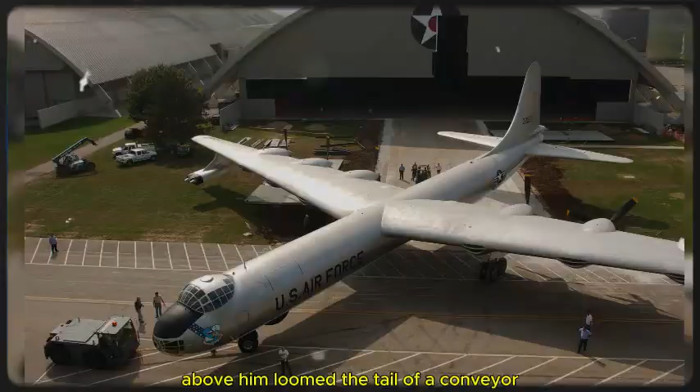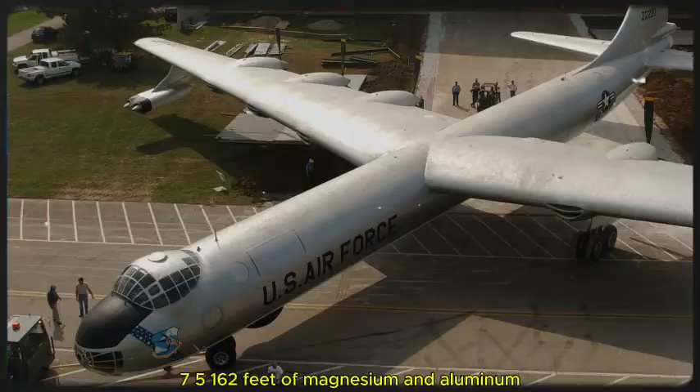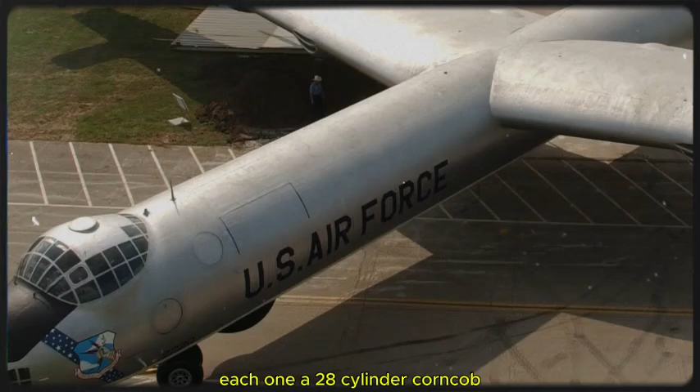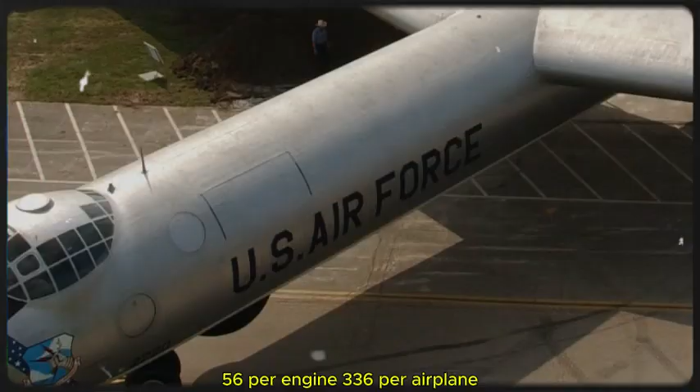The air burned. Metal tools, if you picked them up barehanded, took a layer of skin with them when you let go. Above him loomed the tail of a Convair B-36B Peacemaker, serial 4492075, 162 feet of magnesium and aluminum stretched against a sky so dark it looked like the inside of a coal stove. The bomber's 6 Pratt & Whitney R4360W Wasp Major engines sat cold in their nacelles, each one a 28-cylinder corncob displacing 4,360 cubic inches. Each cylinder had 2 spark plugs, 56 per engine, 336 per airplane.

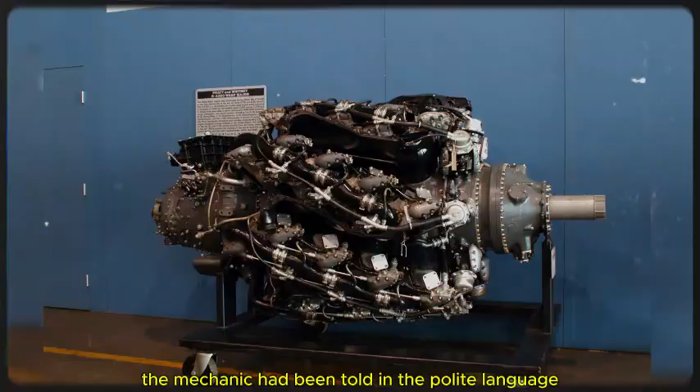Every one of them had to fire. Every one of them had to fire in this cold. The mechanic had been told, in the polite language the Air Force sometimes mistakes for clarity, that if you shut these engines down at these temperatures, you could not restart them. Not that it was difficult, you could not restart them.

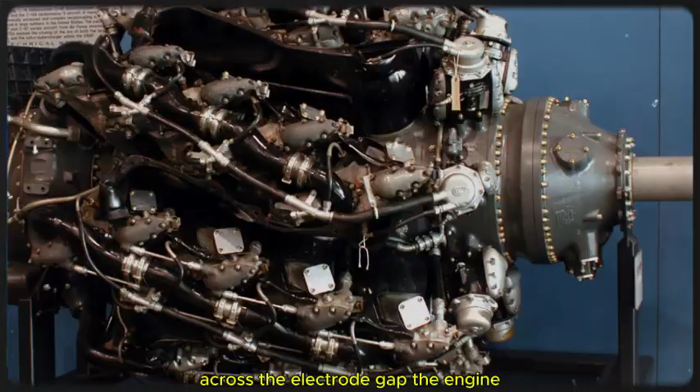The oil became the consistency of cold honey. The batteries lost 2/3 of their cranking amperage, and when the starter finally turned the prop, a single misfire on a single cylinder would coat a plug with unburned fuel that froze into a glaze of ice across the electrode gap. The engine, stone dead, would refuse to fire until someone pulled the cowl, unscrewed the plug, warmed it in his hands, and screwed it back in. Now do that 56 times on an engine buried in a wing, at 40 below, in the dark.

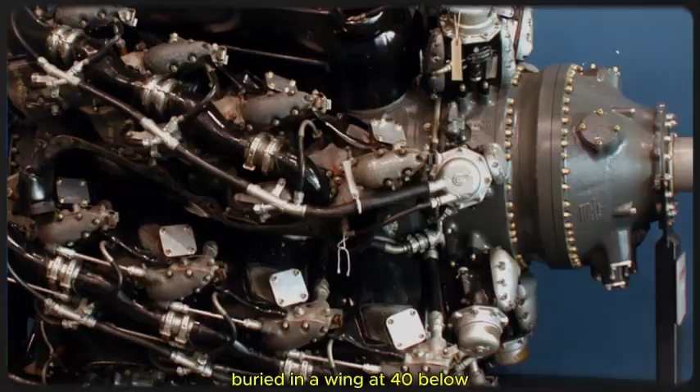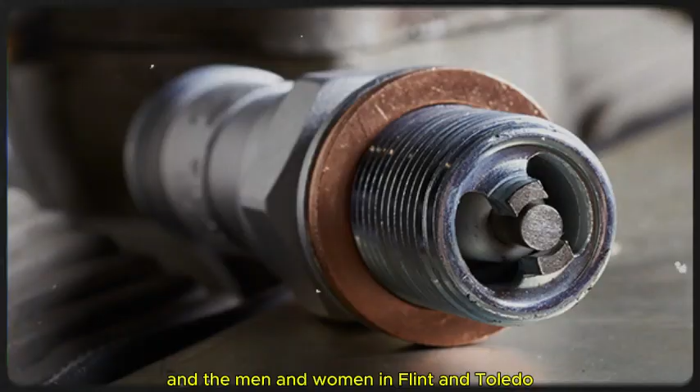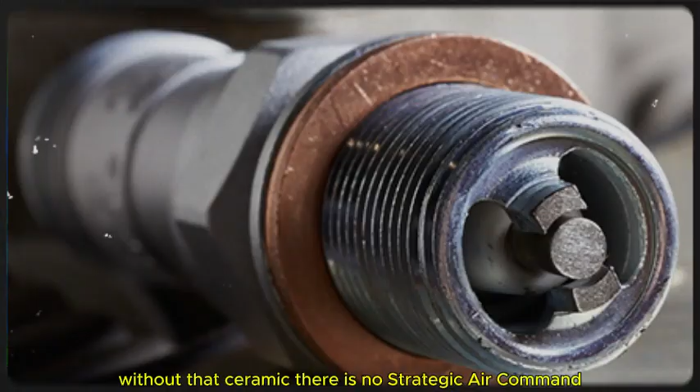This is a story about a small thing, a ceramic cone the size of a shotgun shell, and the men and women in Flint and Toledo who learned how to make it survive a kind of cold the United States had never had to fight in before. Without that ceramic, there is no Strategic Air Command, there is no deterrent. There is no bomber circling the pole at 40,000 feet waiting for a coded order that, thank God, never came.

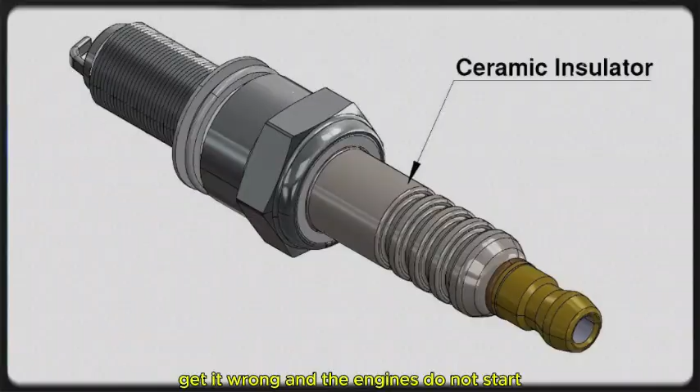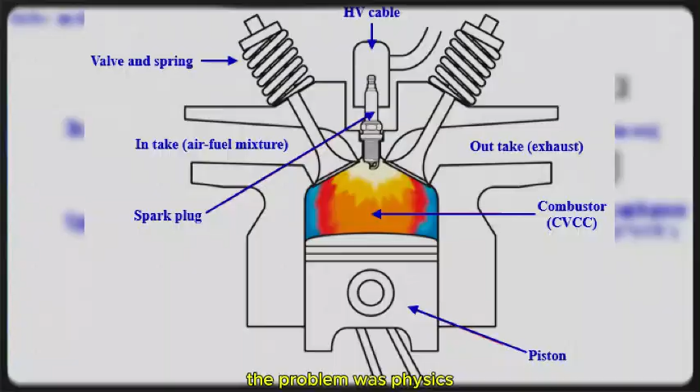The spark plug is the whole Cold War in miniature. Get it wrong, and the engines do not start, and the bombers do not fly, and Moscow learns something about American resolve the Politburo would have been pleased to learn. The problem was physics, and physics does not care about politics.

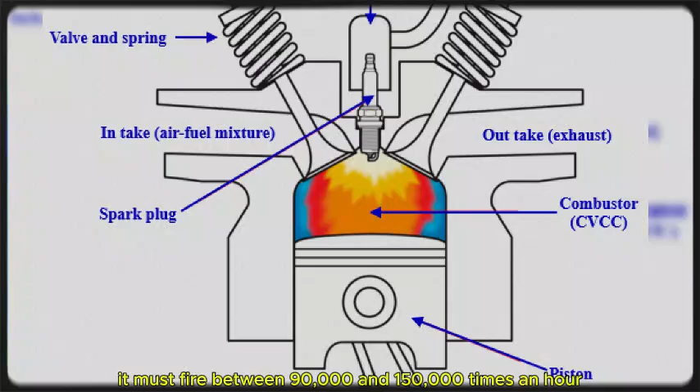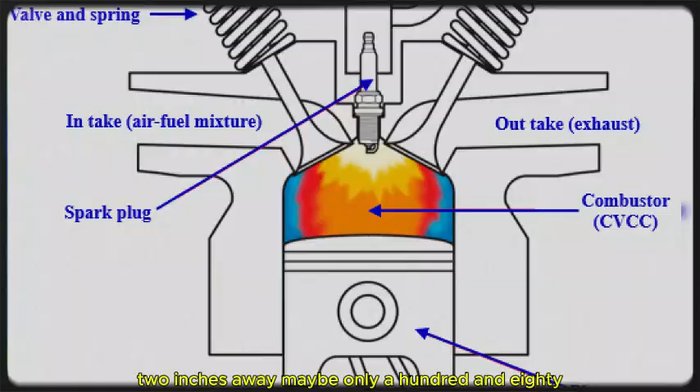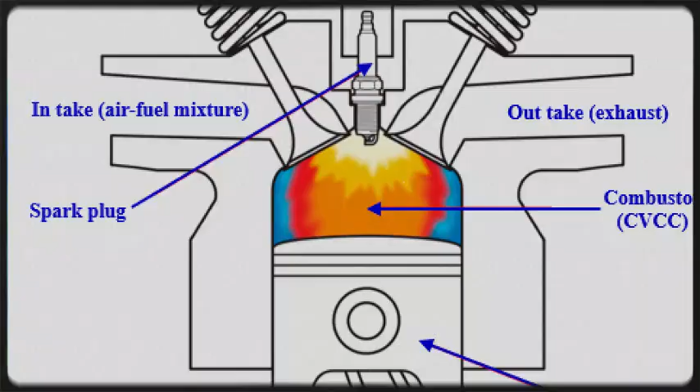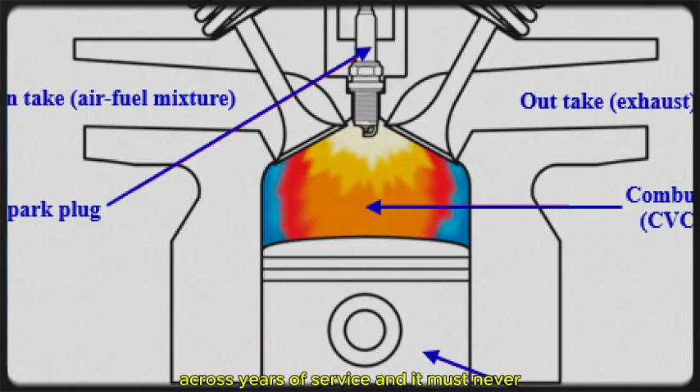A spark plug is asked to do something preposterous. It must fire between 90,000 and 150,000 times an hour. It must survive temperatures of 1,200 degrees Fahrenheit on its firing tip, while the other end, 2 inches away, may be only 180. It must jump an electric arc of between 6,000 and 20,000 volts across a gap roughly the thickness of a nickel inside a combustion chamber filled with burning high-octane fuel at pressures that would burst a cast iron pipe. It must do this for hundreds of hours, across years of service, and it must never, not once, not even for a single revolution, fail to do it on command.

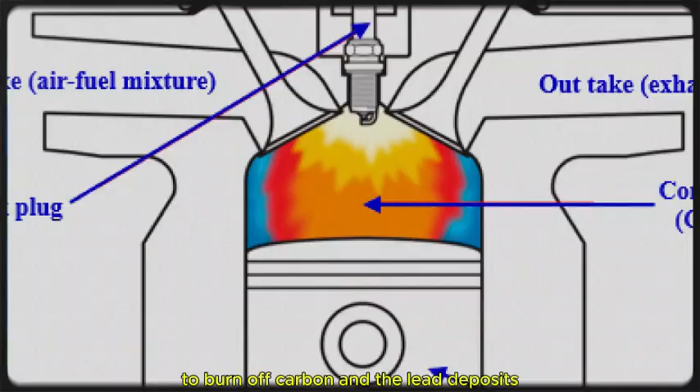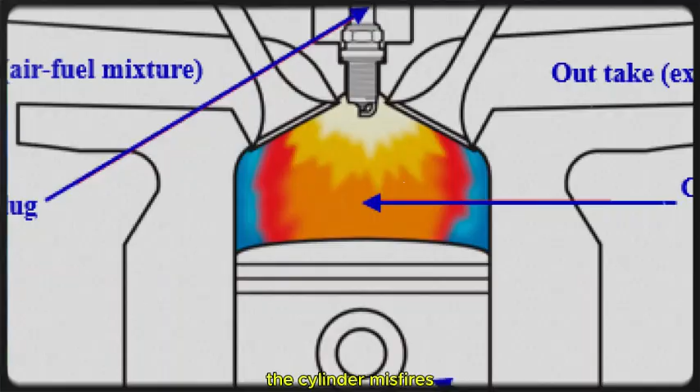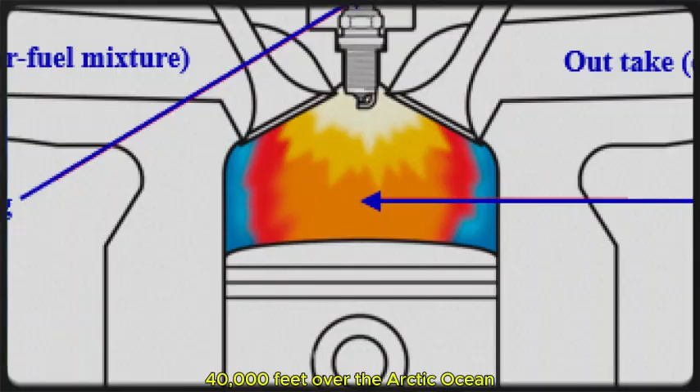The tip of the plug has to run hot enough, at least 800 degrees Fahrenheit, to burn off carbon and the lead deposits left behind by tetraethyl lead in aviation gasoline. If it runs any colder, the carbon accumulates, the gap fouls, the spark fails. The cylinder misfires, and when one cylinder of a 28-cylinder engine misfires, the whole engine shudders and pulls against itself, and a flight engineer 40,000 feet over the Arctic Ocean watches a dial swing the wrong way and begins to calculate how much time he has.

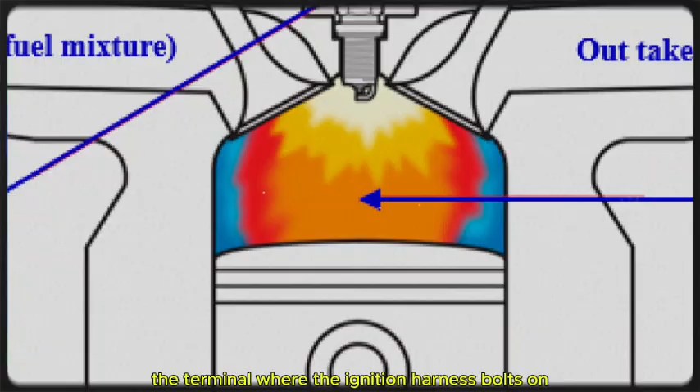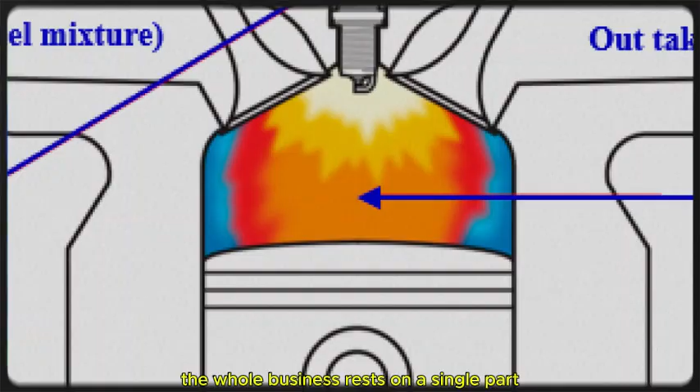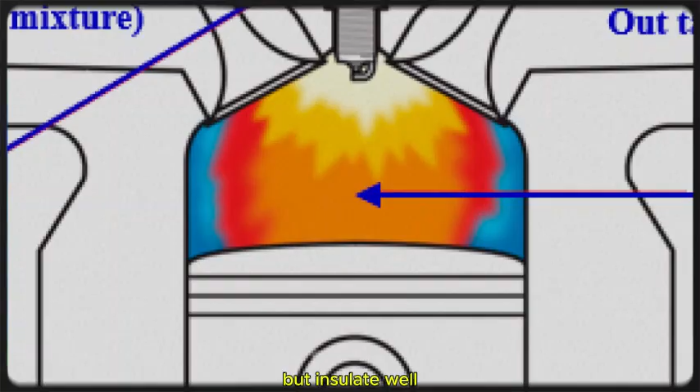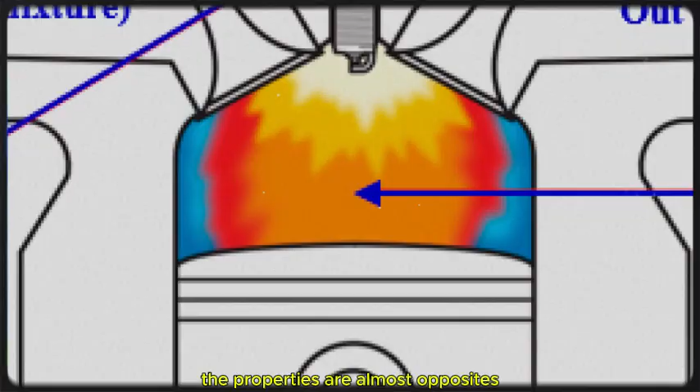So the tip must be hot, but the upper end of the plug, the terminal where the ignition harness bolts on, must stay cool because the electrical insulation cannot tolerate combustion chamber temperatures without breaking down. The whole business rests on a single part, the ceramic cone in the middle. That piece of fired white material, no bigger than a candle stub, has to conduct heat well enough to dump combustion temperatures down into the cylinder head, but insulate well enough to force tens of thousands of volts through a tiny gap rather than leaking sideways into the metal shell. Heat conductor, electrical insulator. The properties are almost opposites. Find a material that balances them and the engine runs. Fail to find one, and you have a very heavy sculpture.

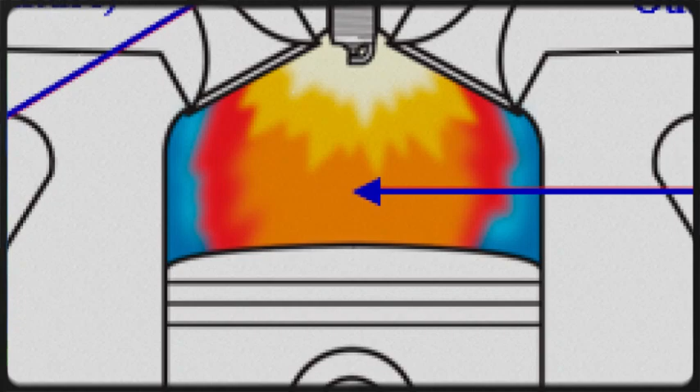For 50 years, spark plug makers had been trying to find it, and for most of that time, they got it wrong.

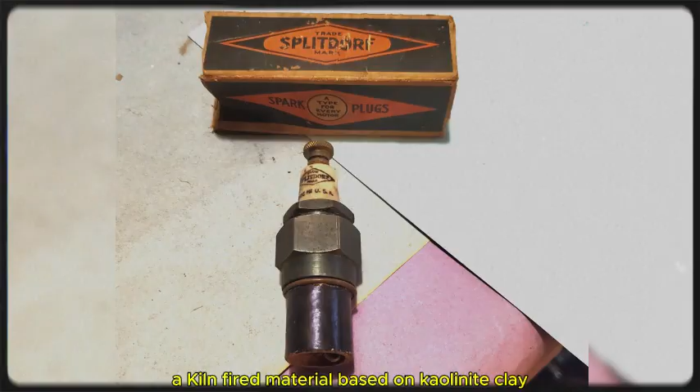Then came mica, thin translucent sheets of the mineral compressed into a cylinder by tension on the center electrode. Mica tolerated heat better than porcelain. It was the material of choice for aviation plugs through the First World War and into the Second. But mica had a fatal weakness. It was a laminate. Lead salts from the combustion crept between its layers. The cleaning intervals shrank from hundreds of hours to tens, and in a four-engine bomber, that was a maintenance burden the peacetime Army Air Corps could absorb only because it did not fly very many of them very far.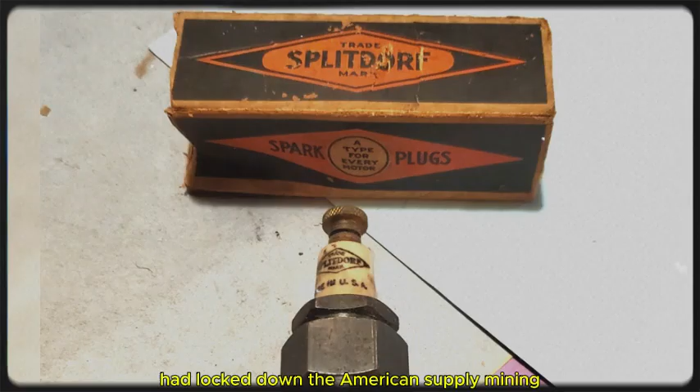Then came sillimanite and andalusite, two related aluminum silicate minerals, sister crystals of the same chemistry found in ancient metamorphic rock. Champion Sparkplug in Toledo had locked down the American supply, mining most of it from a single site called the Champion Mine in Inyo County, California. Their dominance of that one mountain gave them dominance of the plug market through the 1930s. A plug with a sillimanite insulator was tougher than porcelain and cleaner than mica. But sillimanite was a compromise, and everyone knew it.

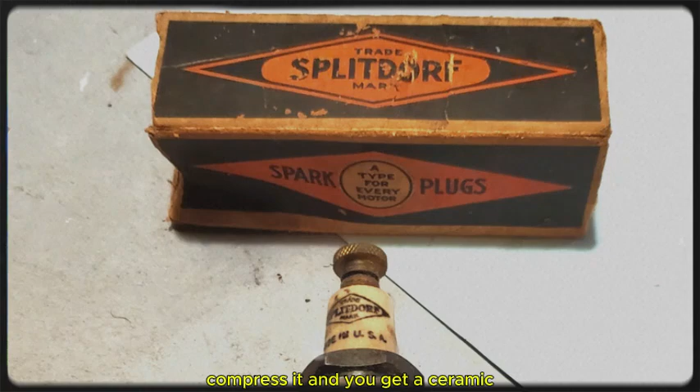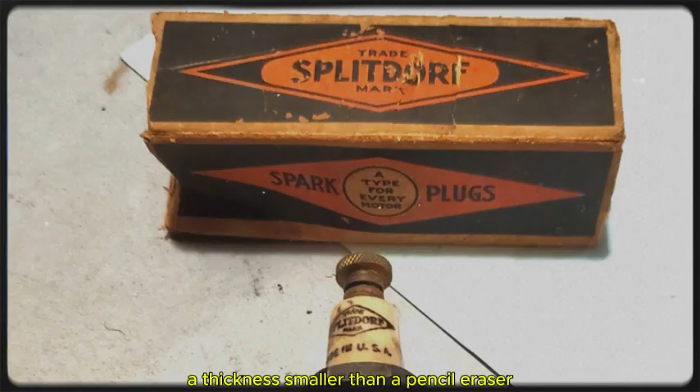Something better was coming. That something was sintered aluminum oxide, alumina, Al2O3, a simple compound, 2 aluminum atoms and 3 of oxygen, held together by one of the strongest ionic bonds in nature. Heat it to 1600 degrees Celsius, compress it, and you get a ceramic with nearly the thermal expansion of steel, 3 times the strength of sillimanite, and dielectric properties that let it hold back 60,000 volts across a thickness smaller than a pencil eraser.

Siemens in Germany and AC Sparkplug of Flint, Michigan had both developed versions of sintered alumina during the 1930s, but the process was expensive, the advantages were incremental, and the war came before anyone was willing to retool the factories. The Cold War did not give that luxury. The Cold War demanded alumina. By the time the bombs fell on Hiroshima, both American manufacturers, AC Sparkplug, a division of General Motors, and Champion, the Toledo independent, were beginning the conversion.

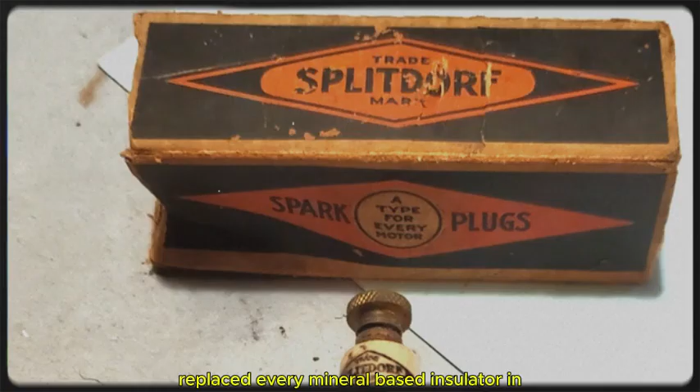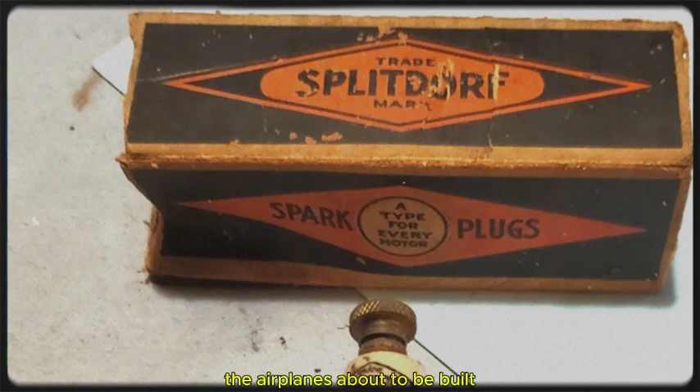By 1948, alumina had essentially replaced every mineral-based insulator in American aviation plugs. The sillimanite mine quieted down. In Flint and Toledo, the kilns ran 20 hours a day. They had to, because the airplanes about to be built would not be built for temperate war.

Anyone who has seen a photograph of Thule Air Base in midwinter knows the mood. The base sits at 76 degrees north latitude, about 900 miles from the geographic North Pole, on a gravel plain where the sun does not rise for 4 months.

Construction began in 1951 under the codename Operation Blue Jay. Most of the buildings went up in the first 60 days by men working in temperatures that shattered hydraulic hoses and made diesel fuel gel in its tanks. The finished base had a 10,000-foot runway, 10 hangars, and fuel storage of roughly 100 million gallons. At its peak, 10,000 Americans lived there.

They were there because, if the war came, Thule was where the bombers would launch from. The Great Circle route from Greenland to Moscow is shorter than the route from Kansas. The Air Force built Eielson in Alaska for the same reason. Both bases served as what planners called forward operating locations, polite bureaucratic language meaning the place from which you would fly the mission that would end everything.

And so the United States Strategic Air Command in the early 1950s found itself holding the keys to a strategic doctrine that depended on an engineering problem nobody had fully solved: how to start a very large reciprocating aircraft engine reliably in temperatures that could reach -60 Fahrenheit on the ramp. The demand was ferocious. The B-36 Peacemaker had 6 R-4360s. Each R-4360 had 56 spark plugs. A wing of 30 bombers needed more than 10,000 plugs just to fly.

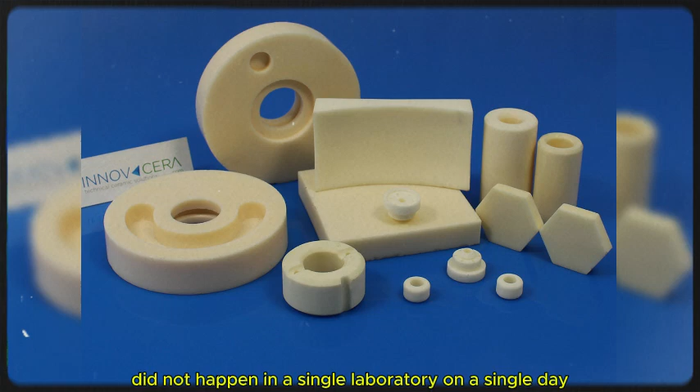You can see now why the ceramic mattered. The breakthrough that made Cold War strategic air power possible did not happen in a single laboratory on a single day. It was incremental, the product of thousands of small adjustments by chemists and ceramic engineers at AC Sparkplug in Flint and at Champion in Toledo, and later at Bendix Scintilla in Sidney, New York, which produced the low-tension magnetos and fine-wire plugs specified for the B-36's ignition system.

The technical problem was this: the ceramic had to be made of nearly pure aluminum oxide, but nearly pure alumina is almost impossible to sinter, to fuse into a dense solid, without tiny additives called sintering aids. These additives lower the melting point of the grain boundaries and allow the particles to bond together without the whole piece collapsing. The trick was to add enough to sinter, but not so much that dielectric strength suffered.

Early formulations ran around 95% alumina and 5% glass former. Over time, manufacturers pushed that ratio higher, toward 98 then 99% pure alumina, using small amounts of magnesium oxide, silicon dioxide, and rare earth additives like yttrium and lanthanum to control grain growth.

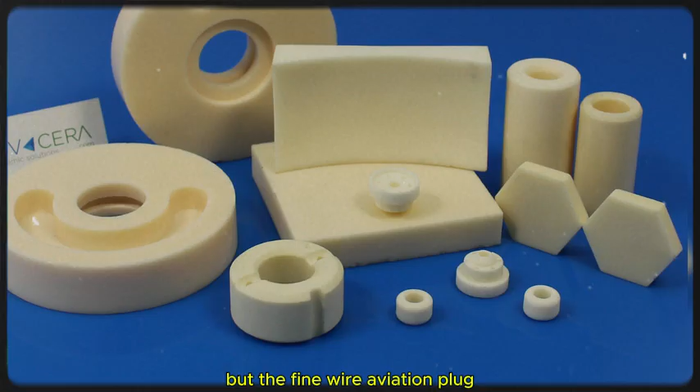The center electrode was a separate problem. A solid nickel wire worked at moderate temperatures, but the fine wire aviation plug specified for the R-4360 used a center electrode of platinum or platinum-iridium alloy surrounded by a copper core that pulled heat down into the body of the plug. In the early 1950s, a single fine wire aviation plug cost more than a good wristwatch. A B-36 flew with 336 of them.

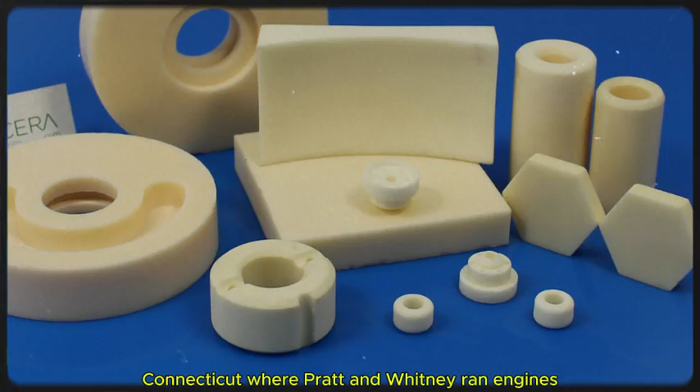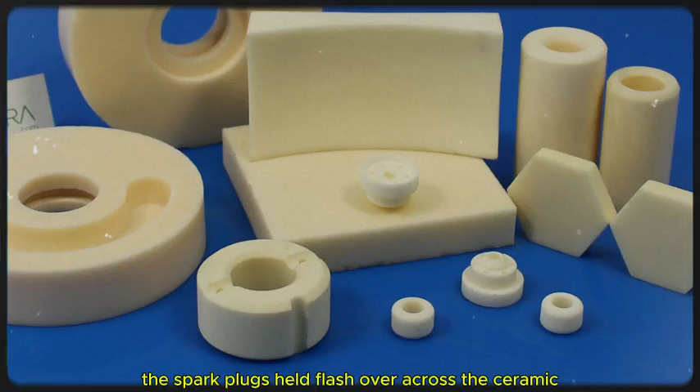The proof came in the test cells at East Hartford, Connecticut, where Pratt & Whitney ran engines against a wall of instrumentation in enclosures built to absorb the noise and, if it came to it, contain the fire. Engines were started cold. Engines were started hot. Engines were started after being soaked at simulated altitude, -65 Fahrenheit at 40,000 feet. The spark plugs held. Flashover across the ceramic, the electrical leakage that had plagued porcelain, dropped to almost nothing.

The carbon burn-off was clean. The issue over its startup remained, and preheat remained mandatory, but the plugs themselves, once lit, stayed lit. That was the breakthrough. Not that the plug solved the cold problem by itself, but that the plug stopped being the weakest link. The plug was no longer the reason the engine failed to start. Everything else, the oil, the battery, the carburetor, the magneto, could be addressed with heaters, with multi-viscosity lubricants, with external power carts. The plug, for the first time since men had been putting wings on radial engines, could be assumed.

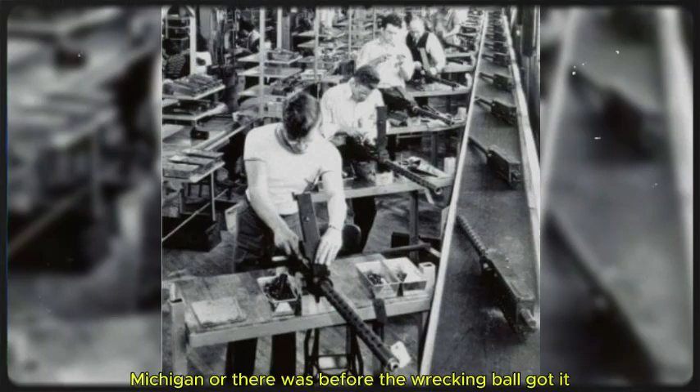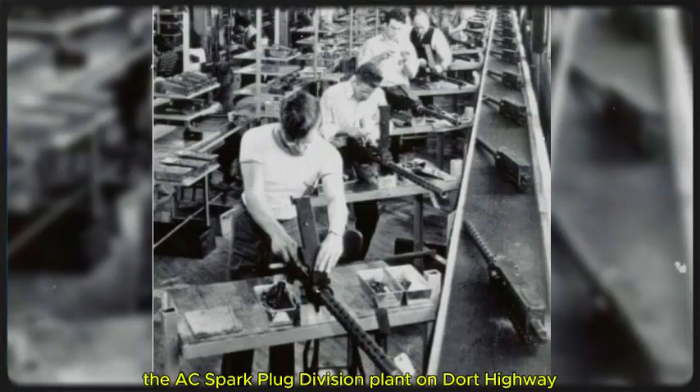There is a building on the south side of Flint, Michigan, or there was before the wrecking ball got it, that deserves a sentence in every history of the Cold War and almost never gets one. The AC Spark Plug division plant on Dort Highway employed somewhere between 15 and 20,000 people at its peak in the early 1950s.

It made the bulk of the aviation plugs used by the United States Air Force. During the Second World War, the same plant had built one of the largest numbers of Browning M2 50-caliber machine guns of any American facility, but that is another story. After the war, the machine gun lines were torn out and the plug lines expanded.

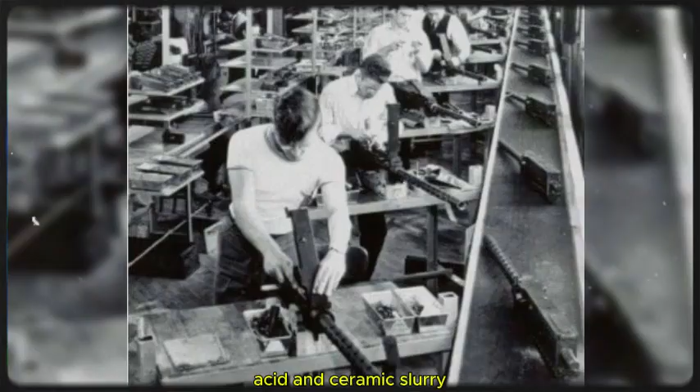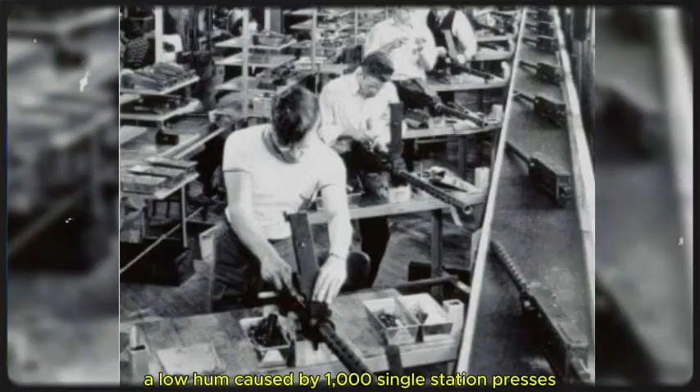The building smelled of electroplating acid and ceramic slurry and the vinegary tang of hot glaze. The floor vibrated at a specific frequency, a low hum caused by 1,000 single-station presses compacting alumina powder into the rough shape of an insulator, each press cycling about 4 times a second.

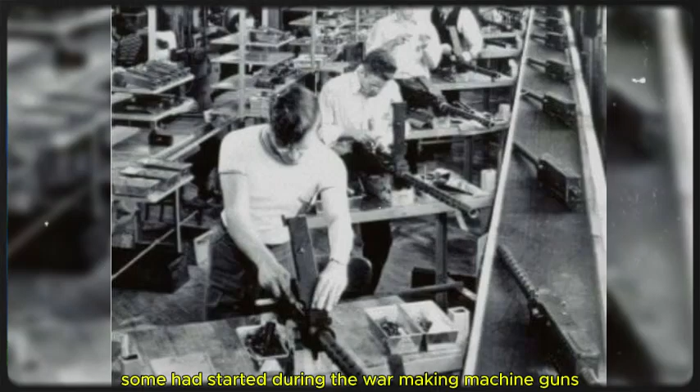Most of the operators were women. Some had started during the war making machine guns and stayed on when the lines changed. Others had been hired out of the small farming towns north of Flint, Clio, Mount Morris, Birch Run, when their husbands came home from the Pacific and the family needed a second income. They stood all day at benches sorting finished insulators for cracks under a row of magnifying lamps. A chipped ceramic, undetected, would cost an engine in a bomber. They knew this. Nobody had to tell them.

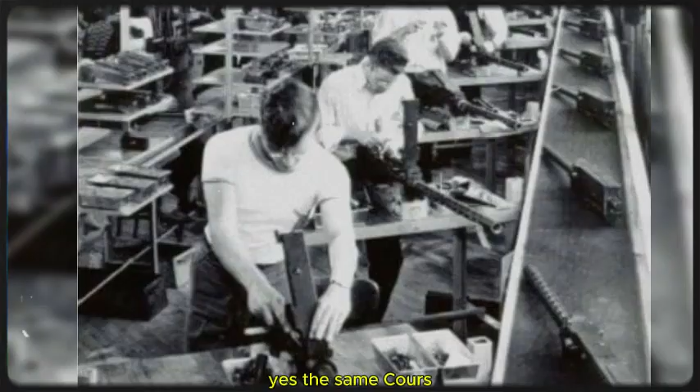Champion, in Toledo, ran a parallel operation. So did Autolite. And on a smaller scale, so did the ceramic division of a company called Coors. Yes, the same Coors. The brewing family had started in porcelain long before they were famous for beer, and the Coors Porcelain Company of Golden, Colorado made ceramic components for a range of American industrial needs during the Cold War.

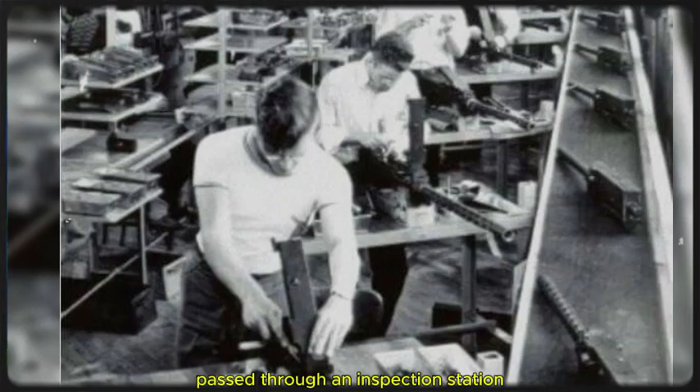Small items, critical items. At AC, a finished aviation plug passed through an inspection station where a technician, almost always a woman, almost always with decades of experience, placed it in a pressure fixture and tested the ceramic at high voltage under simulated combustion pressure.

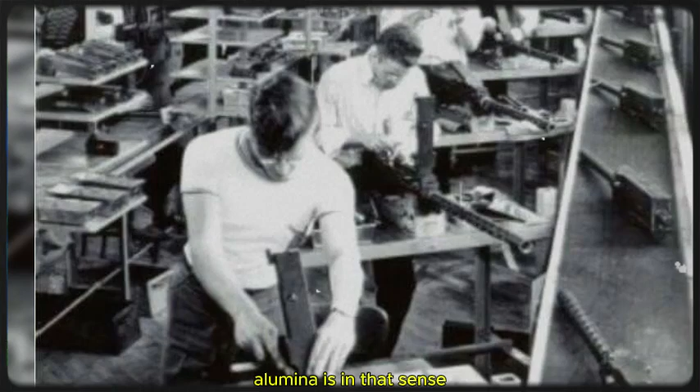Plugs that leaked were rejected. Plugs that cracked were rejected. Plugs with a visible flaw in the glaze were rejected. 1 plug in 5 ended up in a scrap barrel. Those scrap barrels fed back into the raw material chain. Alumina is, in that sense, a forgiving material. It can be ground back down and refired.

The Flint plant ran 3 shifts through the coldest years of the Cold War. It fed a pipeline that stretched from Dort Highway to Wright Field in Ohio, to Pratt & Whitney in Connecticut, to the flight lines at Eielson, Loring, Thule, Goose Bay, and in time, Lajes and Torrejon and Guam.

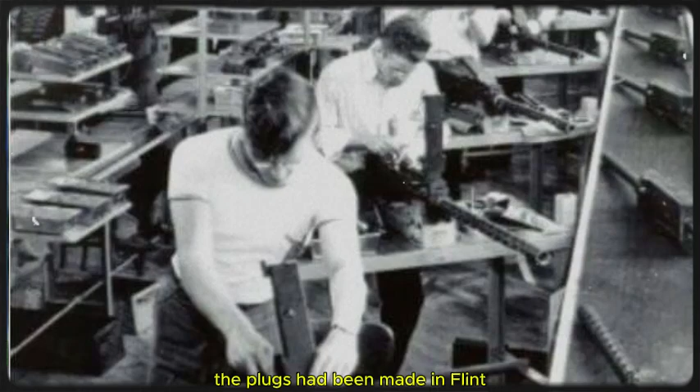When a B-36 in Alaska needed 3 dozen replacement plugs, the plugs had been made in Flint by a woman whose brother probably had flown in another airplane over another ocean 8 years earlier. The supply chain was human. It always is. The bomber got in the air. Sometimes it did not come back.

On the night of February 13, 1950, the B-36B that opened this story, serial 44-92075, lifted off from Eielson carrying a Mark IV nuclear bomb as part of a training mission to simulate a strike on San Francisco. The ground temperature, according to the weather logs and subsequent investigation, was -40 Fahrenheit.

The engines had been preheated. The spark plugs, presumably, had been inspected. The checks had been run. The bomber climbed out over the Gulf of Alaska and turned southeast.

7 hours into the mission, the crew reported flames shooting from 3 of the 6 engines. The other 3 could not maintain altitude on the nuclear payload. Investigators later concluded that ice had formed in the carburetor air intakes. The cold hadn't finished with the airplane just because the engines had started. It was still there, waiting at altitude.

The captain, Harold Barry, ordered the Mark IV jettisoned over the inside passage of British Columbia, where its conventional explosives detonated as designed, preventing any recovery of the weapon's components. Then he ordered the crew to bail out. 12 of the 17 men aboard survived.

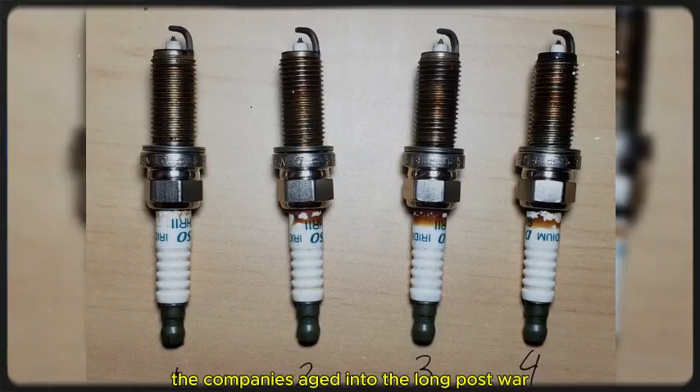The companies aged into the long post-war. The AC spark plug division was folded in 1974 into what General Motors by then called AC Delco, a merger with Delco Remy, the old Dayton Engineering Laboratories company where Charles Kettering had invented the electric self-starter 60 years earlier. The Flint plant survived until 1988, when plug production moved elsewhere within GM and the building was demolished. Today, most of the spark plugs sold under the AC Delco label are manufactured by NGK in West Virginia under contract, a fact that would have astonished the women in Flint who sorted ceramics in 1953.

Champion spark plug became part of Federal Mogul, which was eventually absorbed into the auto parts conglomerate Tenneco. The name survives. The plug on your lawnmower may still say Champion on the side.

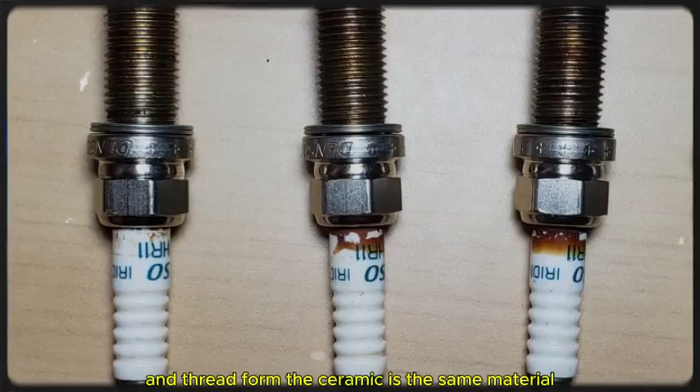The company that Albert Champion founded with his brothers in Boston in 1905 is a brand now, not a place. But the technology endures with remarkable constancy. If you pull a plug from a 2026 pickup truck and set it beside one pulled from a 1954 B-36, the differences are in the details of metallurgy and thread form. The ceramic is the same material. The basic design is the same design. An aviation mechanic from the Cold War could service a modern aviation engine without retraining on the ignition system.

That is unusual. Most Cold War technologies have been superseded: vacuum tubes replaced by transistors, replaced by integrated circuits, film cameras by digital sensors, slide rules by handheld calculators. The spark plug is one of the very few pieces of American mid-20th century industrial engineering that is still essentially what we use today. What the men and women of Flint and Toledo developed for the B-36 is, in miniature, under the hood of every gasoline-powered vehicle you will pass on the highway tomorrow morning.

Come back to the mechanic. Eielson, 1950. 4 in the morning, 40 below. He does not know any of this yet. He does not know that the alumina cone in his toolbox is the product of a half-century of ceramics research that was completed almost by accident, just in time to support the air strategy of the nuclear age.

He does not know that the women in Flint who made his replacement plugs will, many of them, still be alive when the Soviet Union falls and will watch the news that night and wonder quietly whether anyone remembers what they did. He does not know that the B-36 he is about to send into the sky will itself be lost, that ice will foul its carburetors, that the bomb it carries will be jettisoned over British Columbia and not found for 70 years. He knows only that his fingers are numb and that the plug in his hand must thread into its port without cross-threading.